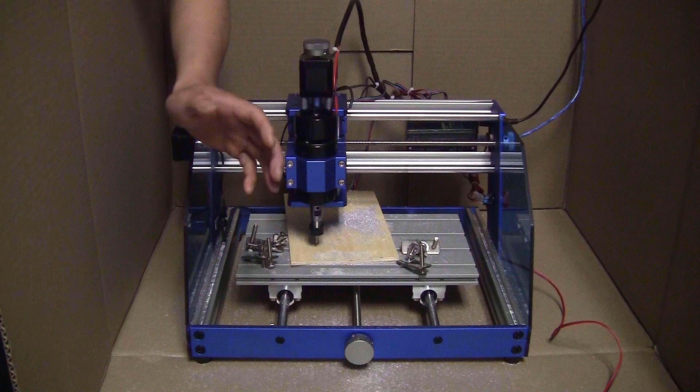Hi guys, as you all know my channel is mainly built on these 3018 CNC machines. I almost cannot get away from them. This type of machine is great for learning, experimenting and prototyping. They are affordable, easy to use with many freeware, but after a while you surely will want to move on to the next level, such as this machine.

I showed you before how I built this CNC machine using a 3018 CNC. This machine surely can be the dream machine for many hobbyists, especially viewers on my channel. I have been using it very intensively to make many things. It is still working perfectly as it should. It is sturdy, precise, fast.

It can cut aluminum very easily without any problem. The only thing still bugging me is that this machine cannot mill steel, mainly because of this high-speed spindle. The maximum speed is 24,000 RPM, which is way too fast for steel. The milling bit will get burnt and ground away. You probably will ask, why don't I just cut at lower speed? The problem with this type of spindle is the torque will reduce with the speed. Lower speed means lower cutting power.

Also, as pointed out by many viewers, this machine design, with a moving gantry, is not the best for metal cutting. Today I decided to build a new CNC machine that will solve both of the problems I mentioned, so I can finally sleep through the night.

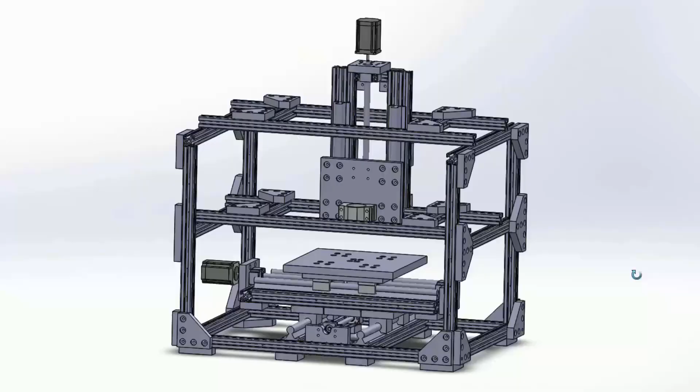The new CNC machine will look pretty much like a box. The frame will be built using 3030 aluminum extrusion bars. Down here are the X and Y axis to move the platform. The Z axis will stay in place, just moving up and down. All the plates and brackets are designed to be milled with the 3018 CNC.

There are 3 plates like this one, and this one might be too big in size for the 3018 CNC to cut the outline, but all the holes and slots will fit inside the 3018 CNC working area. I will show you in detail how to make this biggest plate. The rest of the plates and brackets are really easy, so I won't go into details of the process.

To make the frame more sturdy, I will use 3/4 of an inch thick plywood. The linear rails are SBR 20 or SBR 16. I have SBR 20 for the Y and Z axis. I bought the SBR 16 for the X axis by mistake, but that will be fine. You can replace them with SBR 20 if you like.

All the end bearing mounting plates like this and this are designed to give you plenty of room to use either SBR 20 or SBR 16, and the same flexibility applies to the ball screw. I have the SFU 1204 on the X and Y axis and the SFU 1605 on the Z axis. The reason I have the 1605 on the Z axis is because I already have one in my stock.

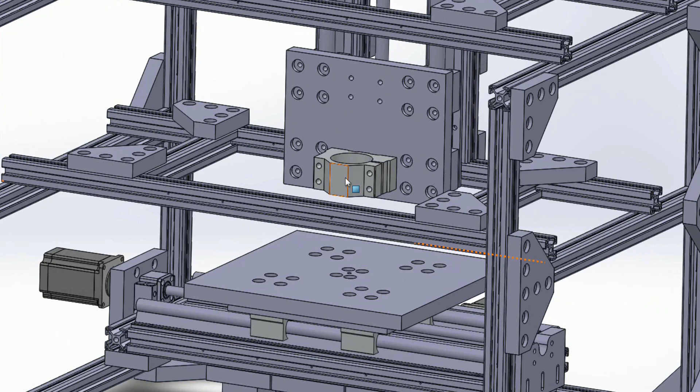For the spindle of this first version, I will use the 52 mm diameter type because I already have one. Hopefully it can still cut aluminum smoothly. Another reason is that I want to keep the cost of this machine low.

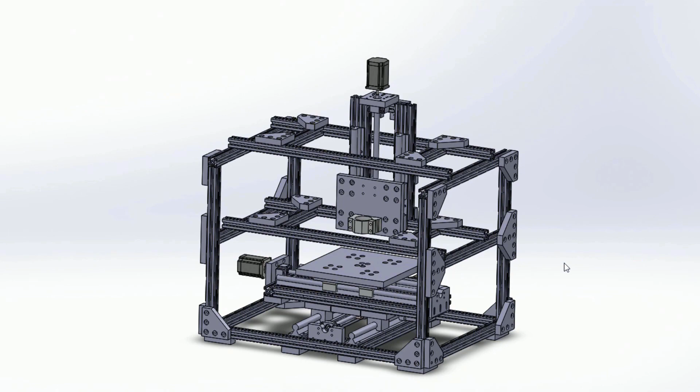Right now I'm still waiting for all the materials to arrive, so I will show you first how I will mill the plywood parts. In Fusion 360, I will go to File, Open from my computer, go to the folder of the machine design, go into Step Files, Platform. I just go directly to Manufacture, create a stock. This time I will choose the reference in the middle of the plate.

And click OK. I will mill all the brackets and plates out of 3/4 of an inch thick plywood. I will go to 3D pocket clearing, select tool.

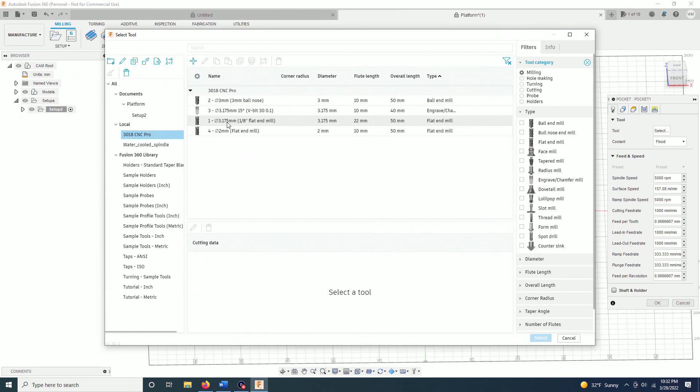I will choose my favorite tool, the 1/8 of an inch flat end mill, 12,000 RPM, cutting feed rate. For pocket clearing, I will leave it at 1000 mm per minute. I just leave all the parameters as I entered before.

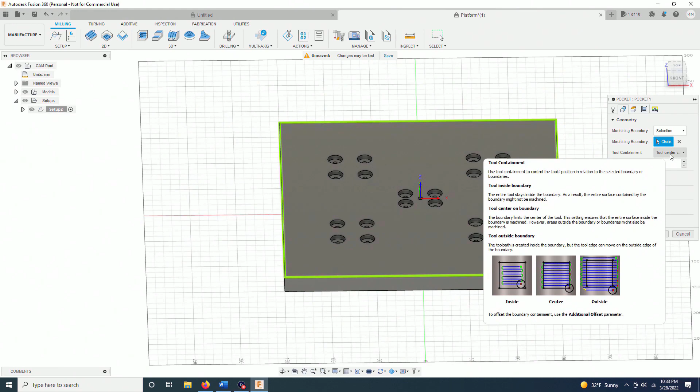Machining boundary selection, this boundary. It will mill all the holes inside the plate. Bottom offset minus 0.7 mm - this is to make sure that the bit will plunge all the way through the plate.

Tolerance, well, I will give it a bit more precise. Maximum roughing step down, I will go with 1.5 mm. Stock to leave, nothing. Full retraction, no. Shortest path.

Okay, this one I will increase it a little bit, 3 degrees. Ramp clearance height, maybe I put 1 mm. Minimum ramp diameter - because those holes are pretty small, so I will make it a lot smaller. I will put 0.5 mm and click OK.

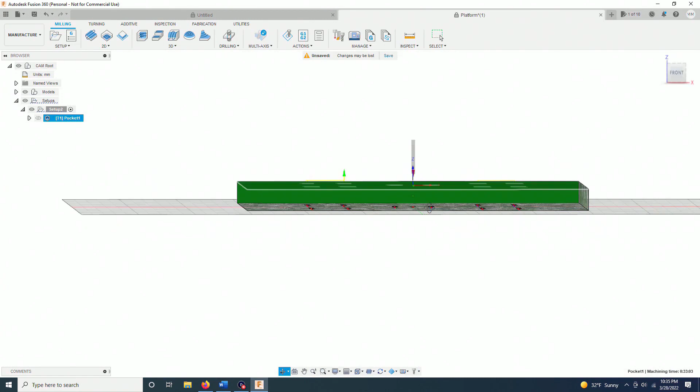As you can see here, all the holes are milled through, so that's what I want. And that's it, I'm done setting up the tool path for this plate. Very easy, so just right click, post process.

New, ultimate CNC machine. Name the file - well, I will create another folder in here first. It will be Platform.

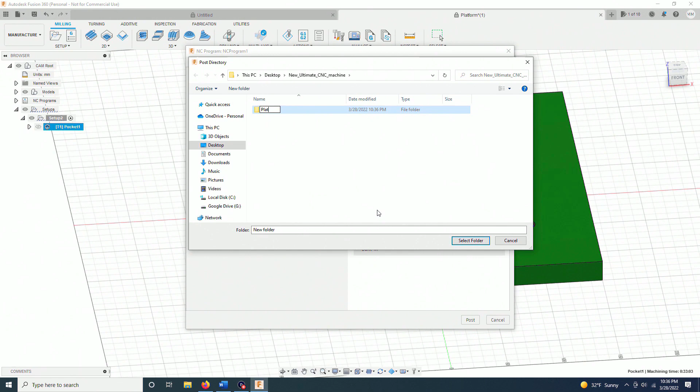Toolpath number 1, 3.175 mm flat end, and post.

And the platform cut to size here, 30 by 30 centimeters. Now I will have to find the center of this plate. It's very easy - I just take a long ruler and draw 2 diagonal lines. And here is the center.

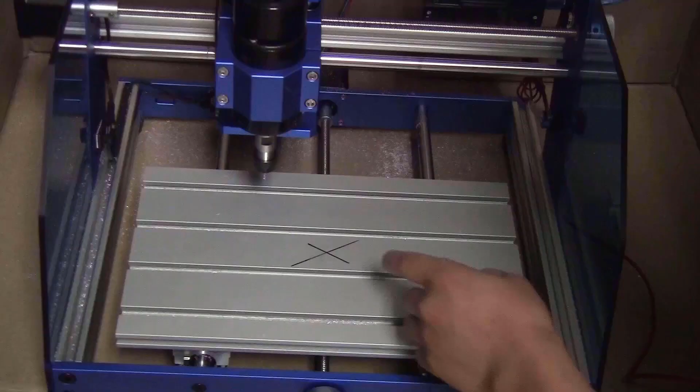I will do the same to find the center of this platform. And this is the center. Next step, I will try to center the bit to this center of the platform and then set X and Y to 0. Just about like this, you don't need to be very precise.

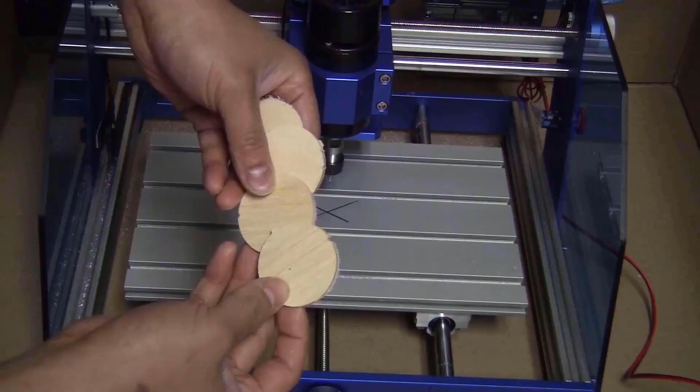I have some pieces of plywood 1/8 of an inch thick. I will use them to space between the stock and the platform so the bit doesn't cut into the platform. At the four corners like this, I will use double side tape to tape them down.

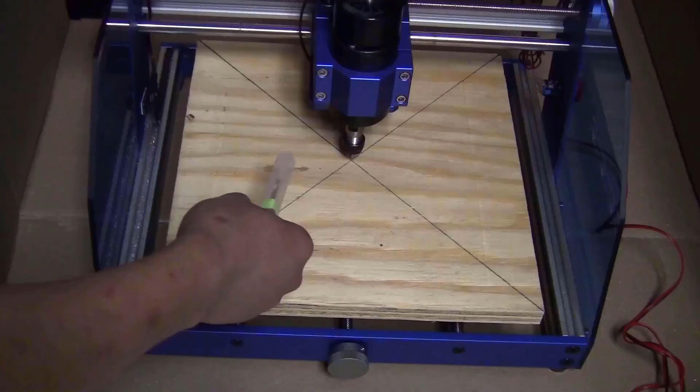Okay, I take the platform like this. One thing I should do first before fixing this stock on the platform is changing the bit. This is a 1/8 of an inch flat end mill bit. The flute length is 25 mm, so it will be more than enough.

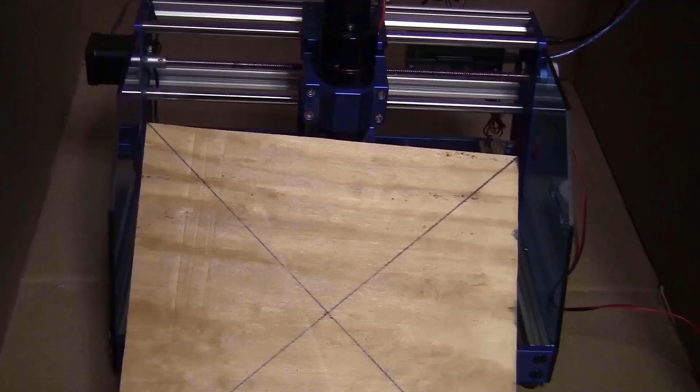Now I will have to find a way to fix this piece on the platform. I will start by putting some double side tape on this wooden piece first. Now I will try to align the center of this piece to the bit. Press the corners down.

It is pretty sturdy, but I don't think that it will be enough, so I will have to find a way to reinforce this. What I was thinking about is to cut some pieces of angle aluminum like this, 90 degree. This side I had to cut a bit shorter, so it can fit on the side like this, and slide inside the platform like this.

I will drill a hole here and thread it with an M6 tap. This one I will drill a hole around here to make sure that when I tighten the bolt it will press right in the middle of this piece of plywood. The hole should be around here, probably 20 mm or 25 mm from this edge.

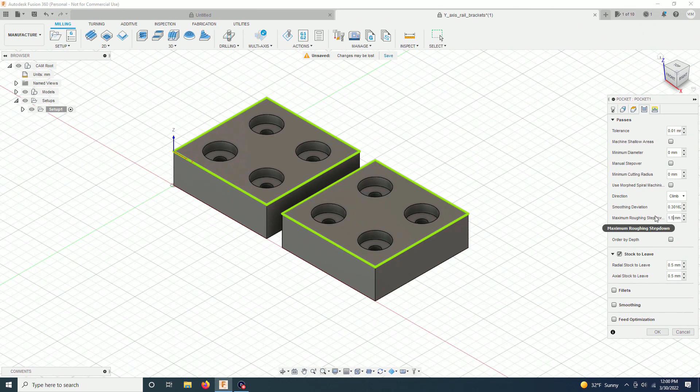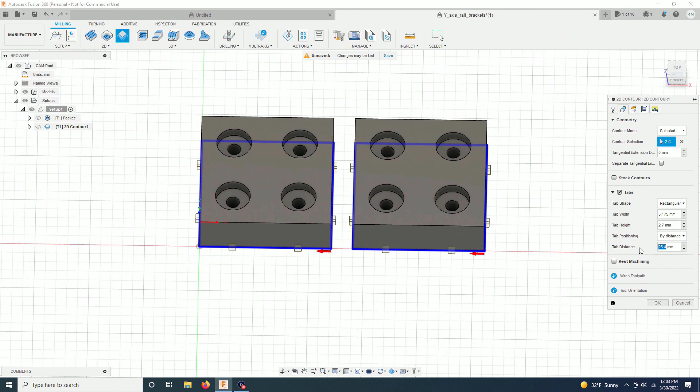For these smaller pieces, the only difference is you can add a 2D contour to cut the pieces out of the stock. That way they look better and more square compared to cutting with the saw. For the 2D contour, it's still the same, but you have to reduce the cutting feed rate. I will go with 300, plunge rate 100. Contour selection: this one and this one. Tab, yes. Tab height, I will increase it a little bit to 2.7 millimeters. Tab distance, I will increase it so I have fewer tabs, like this.

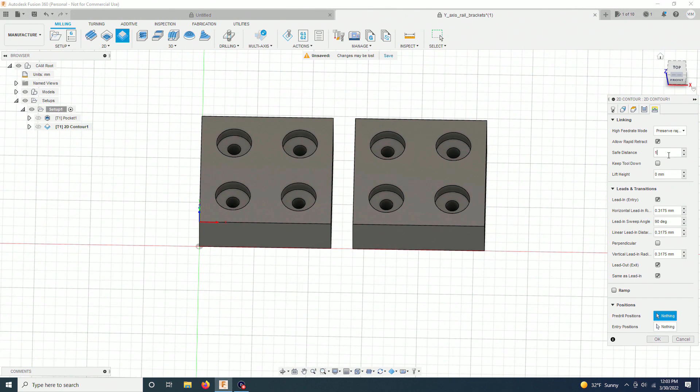Multi-depth, just go very slow, let's say 1.5 millimeters. Yeah, we have to reduce this, and click OK. And that's it, everything looks good. I will use these two paths to cut.

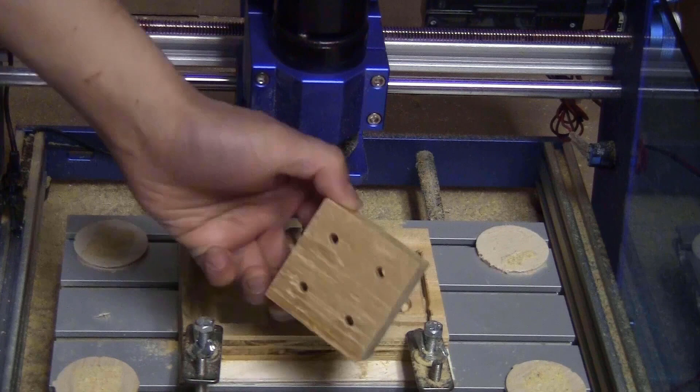Not too bad. I think the top will need to be a bit thicker because the pieces get loose, but it will cut all the way through. The edges are smooth, so I think that's good. I will continue to do this for a few more days.

Here are all the pieces that I need following my design. I hope that I didn't make any mistake because it took me 2 weeks to mill all this, and I am kind of sick of setting up the milling on the 3018 CNC. I really need to take a break from that machine right now, but for now the most tedious step is done. Let's move on to the next one.

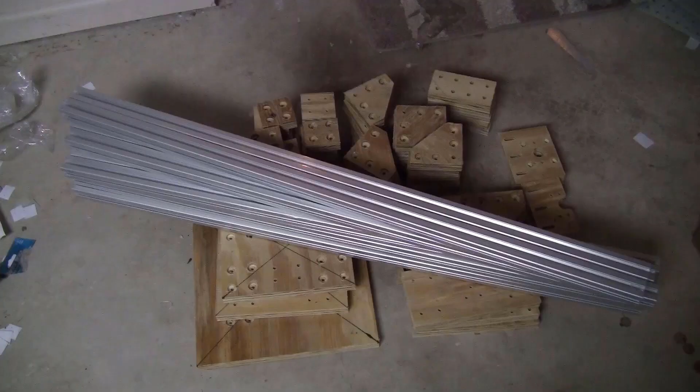From my estimation, I will need about 16 or 17 aluminum extrusion bars like this, 3030 series, 1 meter length. So I bought 20 of them and they cost me $200. Now I will have to trim them to length. I will include the list of lengths that I need and also how many pieces of each. You don't need to trim those bars to the exact length, but try to be as close as possible. The most important thing is that each set of bars should have the same length.

And to trim them to that requirement, I will use the same trick that I show in many videos. I will use an M8 tap to make the thread at the end of all the bars, then use this type of plate to attach them together at both ends so they will be aligned and won't move when I cut. Using this plate I can attach a maximum of 8 bars together, but you don't need to attach all 8 bars, you can attach as many as you want. For example, I will need 6 bars of 750mm length, so I will only use 6 slots.

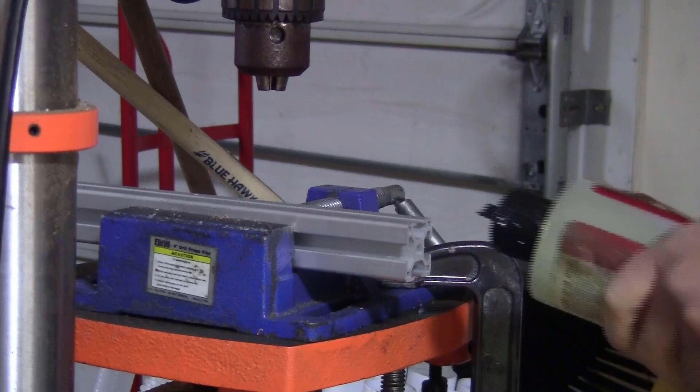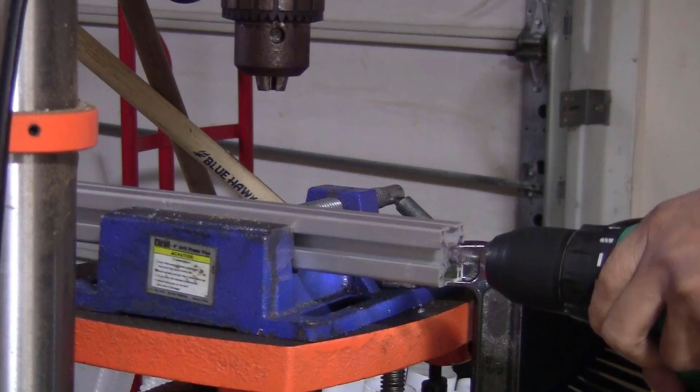To attach the bars to the bracket, I will use an M8 bolt, 30mm length, with a 13mm hex socket.

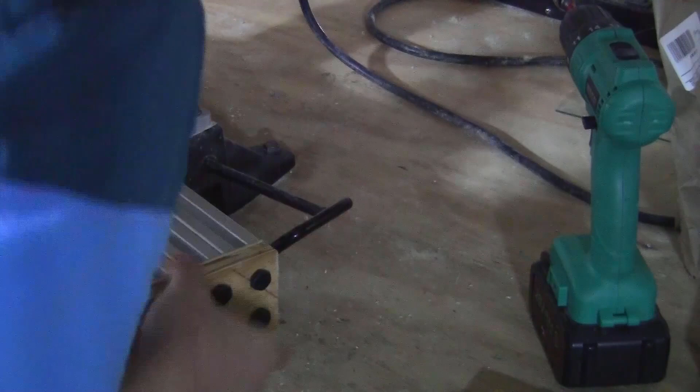Now I have all the bars attached together. I measure and mark the length, adjust the blade, and clamp the bars down. As you can see, cutting all the bars to the same length is really easy. I will make the thread on this end of the bars too, that will make the assembly of the machine a lot easier.

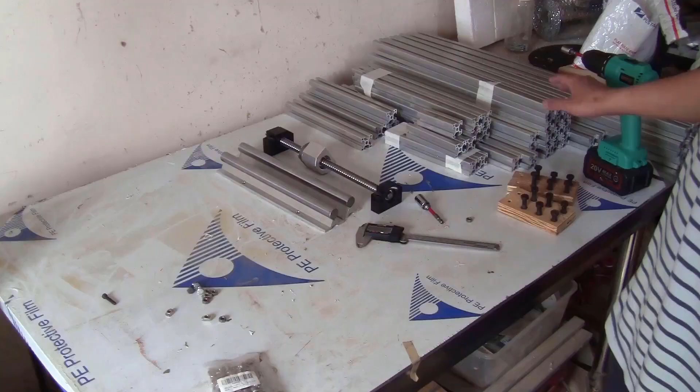I have all the aluminum bars cut here, so I am ready to assemble the machine. There are 2 axis blocks: the X-axis and the Z-axis, which can be assembled without being attached to the frame of the machine. I will start with the Z-axis block. I take the 4 bars of 330mm length and attach the ends together.

I take the 2 linear rails, SBR20, 300mm length, and place them on like this. I will use M6 10mm length to attach the linear rails to the bars, dropping in T-nuts M6. I place the rail on the bars like this, and do the same thing on this one.

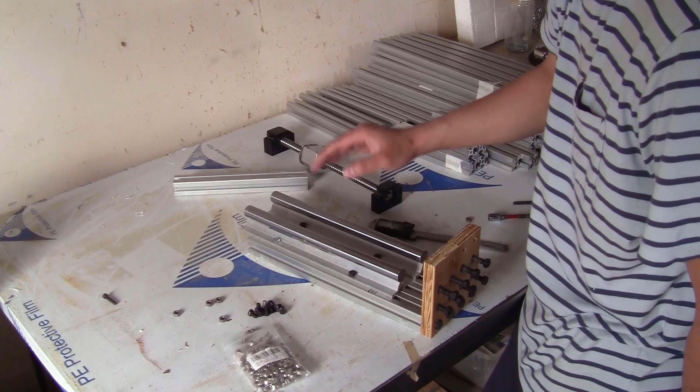The way I wanted to install the rails on the bars is that this rail will stick out about 13mm from this edge of the bars. So I take one of these bars, place it underneath, and push the rail to the edge of this bar. Roughly, you don't need to be precise. Now I can tighten the bolt.

Now I just slide on the linear bearing blocks. Take the Z-axis gantry block; this side is to attach the spindle. It should go this way where the rails stick out. Place this one on like this. I just need to bolt it down, using some M6 20mm length bolts.

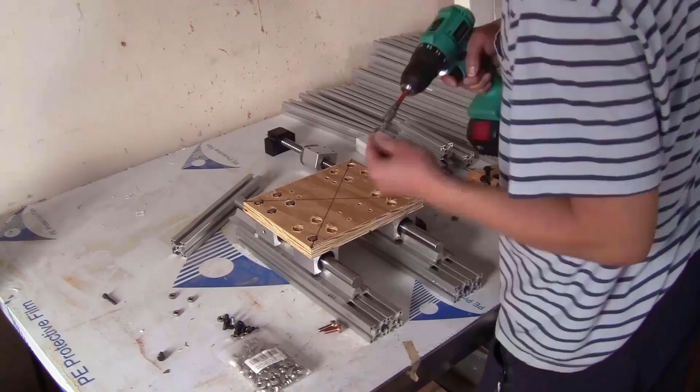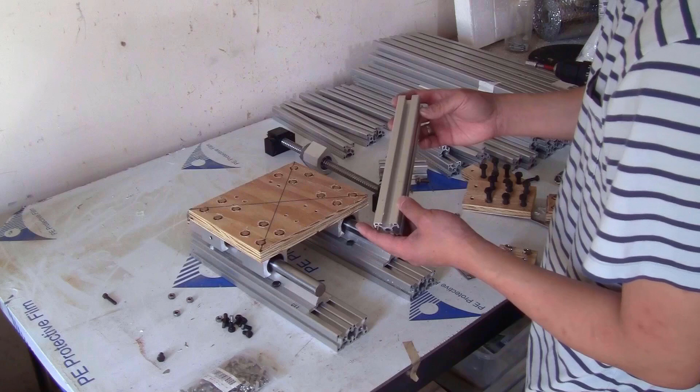Now this plate will be the reference to keep the distance between the two rails. Now I will take one of the 210mm length bars and place it like this. At the end of this bar, I will use some square brackets to attach this bar to those bars.

Next step, I will attach this ball screw set on this plate. I will have to use this piece as a spacer, like this. Place this underneath, and use some M5 bolts, 28mm length, to attach the ball screw to the plate.

Remember that this BK12 block is on this side. Now I will attach this coupler to the ball screw.

Next step, before attaching this block to this plate, I will attach the stepper motor to this plate first. I have 4 of the M5 60mm length.

I will have to attach the motor on like this. I will try it on like this. Slide it in, push it all the way in.

Measure the distance here. Okay, it is about 22mm. Maybe I'll keep it at 23 or 24 to be safe.

I will use a lot of M5 nuts as spacers. I will need about 5 of them on each bolt. I don't think I will need the bolts this long. Put on the nuts.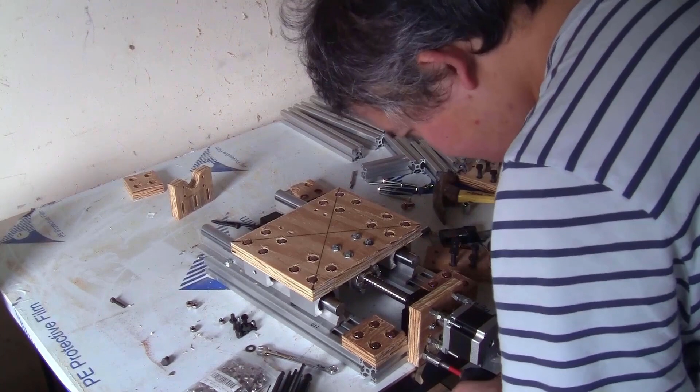Tighten the set screw on the coupler, then turn this around.

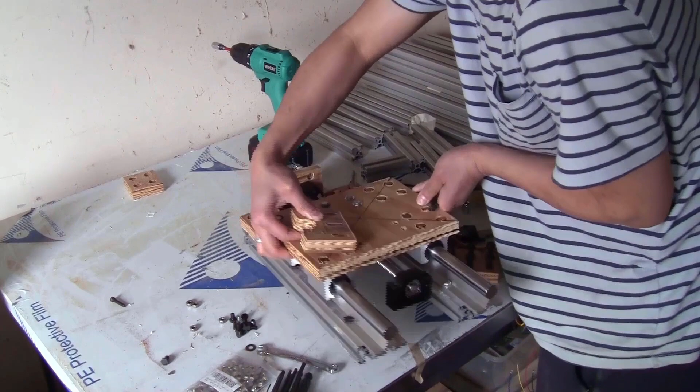Before attaching this piece to this block, I slide some M6 bolts through and put on the drop-in T-nut. Now I can slide this plate on the 4 bolts, and I just need 4 nuts to tighten the bolts.

Now I will flip this block over. Take this ball screw of 90mm and slide it in here.

Okay, press this against this. I will use 2 of the square blocks to fix this bar like this.

And that's it, I'm done with the Z-axis block. It is very sturdy and everything can move very smoothly.

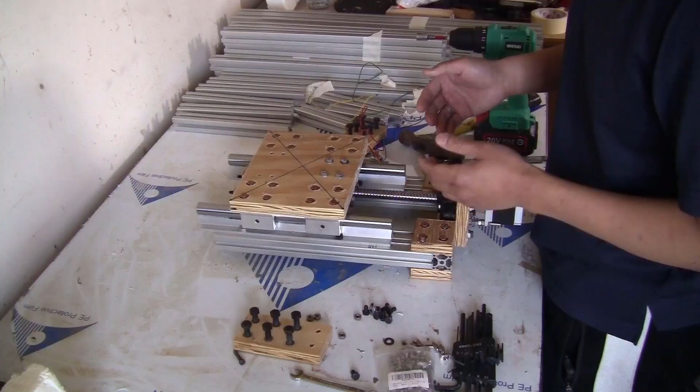I take 4 bars of 500mm length. As I said before, for the X-axis I will use SBR 16, 500mm length. But to make it less confusing in the design that I share, I will only use SBR 20.

Actually, before installing this rail on those bars, I think it's better to use some square blocks to attach the bars together first.

Now you can fix the rails on the bars.

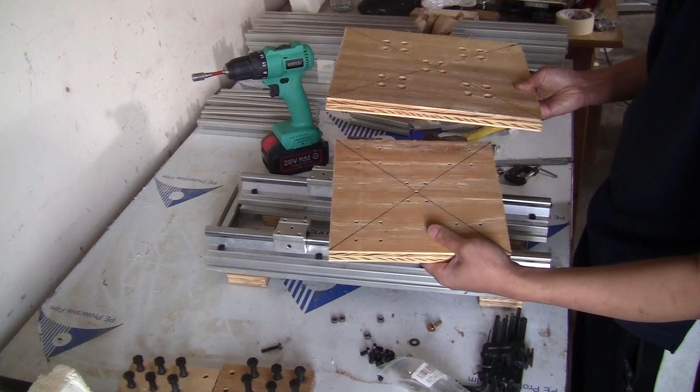I will do the same thing for this side. I just slide on the linear bearing blocks. I will have to attach these two plates on those blocks, using 16 of those M5 40mm length.

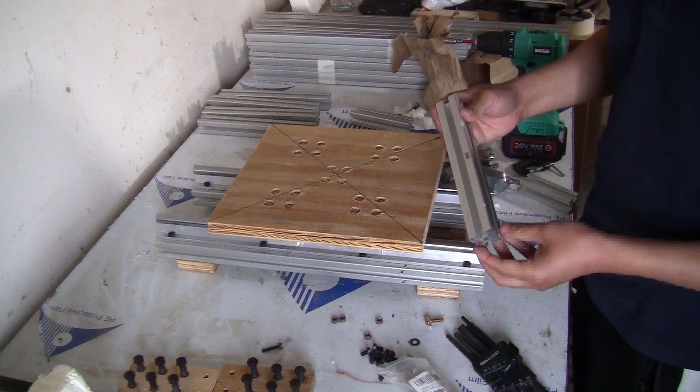It slides really smoothly, a little bit different from the Z-axis. To fix this 210mm bar at this end, I will use this type of corner bracket that I bought on Amazon, like this. The reason is that I don't have any space up here to use the square bracket.

And now I flip it over. Now I can reinforce these corners with the square brackets.

All the next steps are very similar to the Z-axis block, so I'll just skip through them very quickly.

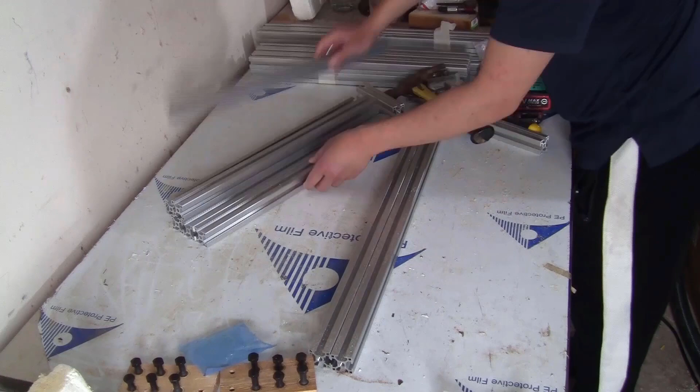For the base of the frame, you will need 2 of these long bars, 750mm length, and 6 bars of the same length, 500mm.

The base of the frame will look like this. These bars here will be used to install the linear rails, and this to fix the side of the frame. So let's just put everything together. I will start by installing the linear rails on the bars first.

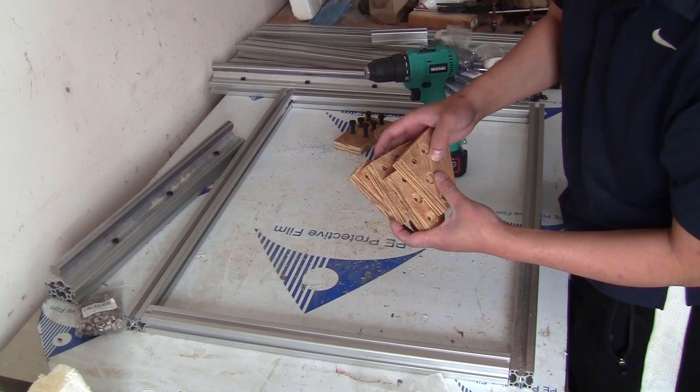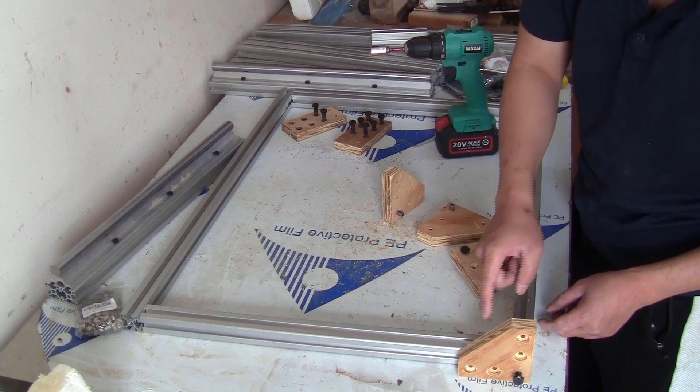Now I take these 4 of the 90-degree corner brackets. The 4 brackets have a big hole in the corner here to slide the M8 bolts through. These 4 corner brackets will be attached at the corner like this. The M8 bolt here is to attach to the end of this bar.

Now I have this rectangle base attached together. Just put the rails in here.

From my design on the computer, I measured the distance from this edge to this edge as 219 millimeters. I take this ruler, put 219 millimeters, and again I'm going to use some of this corner bracket to fix this bar together first.

I can take the bracket off later, but for now I just want to make sure that the bars won't move. And I will leave this side loose for now so it can move around.

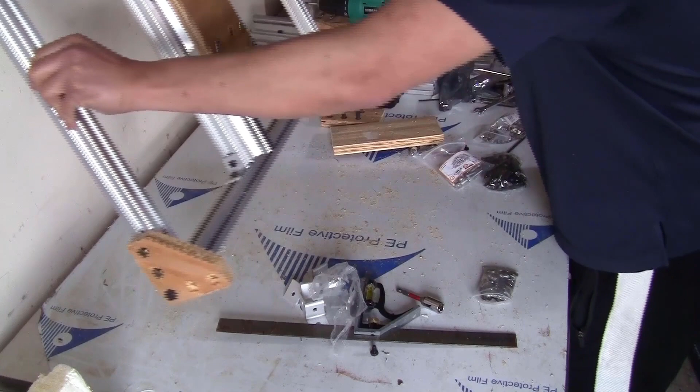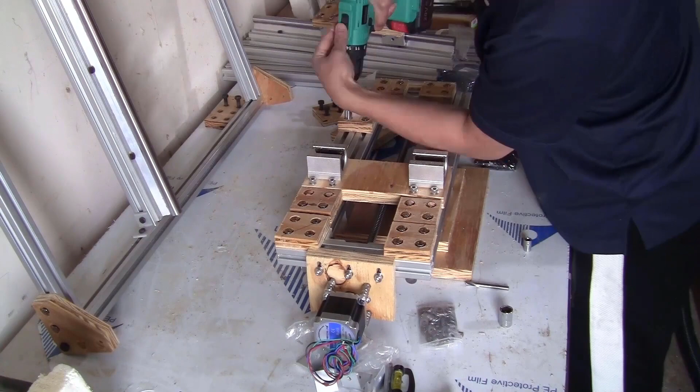I take the x-axis, put it on the table like this. This plate is supposed to be installed like this. I will move the bracket closer to the edge here. Again, from my design, I measure the distance from this edge of the bracket to the inner edge of the aluminum extrusion bar is 110 millimeter.

I actually will have to uninstall the brackets. After measuring, I will fix this bracket down. Now I will use this square bracket to fix this bar to the frame. Make sure that the y-axis moves smoothly and fix also this side. Now you have those square brackets on, you can take off those side brackets.

Next step, I take this corner bracket to reinforce the corner of the frame. I will also reinforce the bar with 2 square brackets. Next step is to install this ball screw on the y-axis, but before doing that, I will attach this 130mm length bar. I will use 2 of the square brackets to do that.

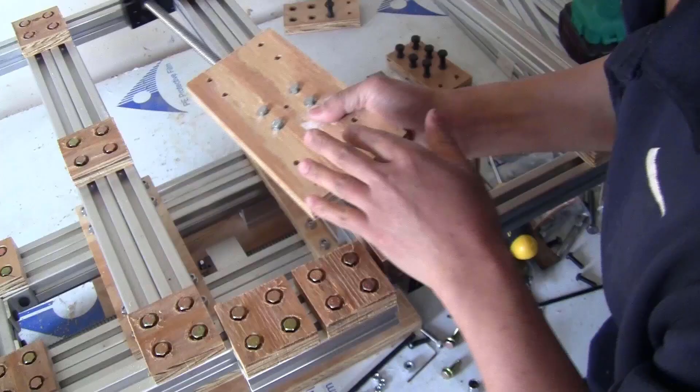Now I take this plate and the spacer, attach this plate on like this. I will use 4 of the M5 28mm length. This plate here will be fixed right here, so I will slide some of the M6 bolts through with the drop-in T-nut. Roughly adjust this to the middle here of the 2 brackets and tighten the bolt.

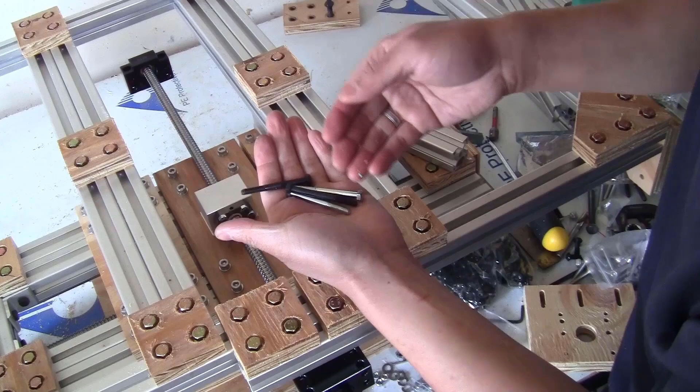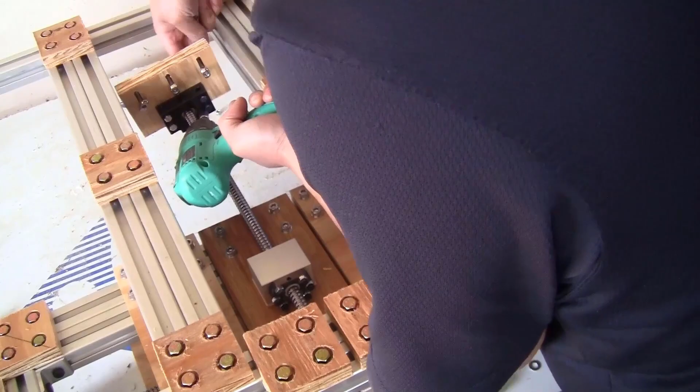I will take 4 of the M5 bolts, 40 or 45mm length, slide through here. Now I take this plate, slide through some of the M6 bolts. I just slide this plate on here and tighten with the nut. Actually, I should turn this block around and slide this plate on this way. I will leave this side like this for now. From here, things get pretty similar to the X and Z axis.

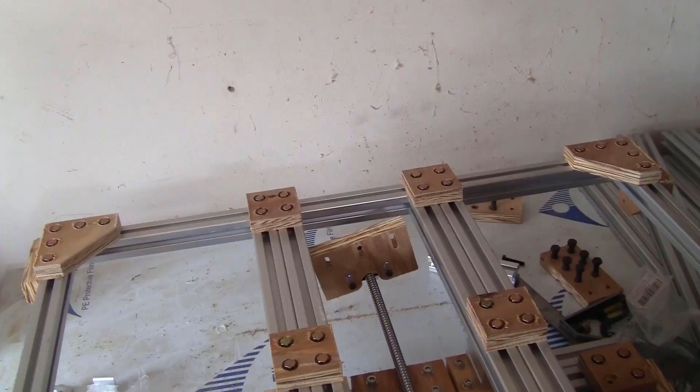Now this end is fixed, I can fix the other end. This is not easy, so I think that I can think of another way to fix this. Okay, what I will do is that I will slide the bolt on this plate first and attach it on the block from this side. So that way I will have more space back here. Now I can use the bolt again. Slide this bar on.

I just realized why I made the design like that before. Because if I do it this way, I cannot really attach this bar to those bars using the square bracket. It gets blocked by this bracket. So I have to think of a way to shift the bracket a bit to the side. I think that I will use the bracket to fix the inner corner here.

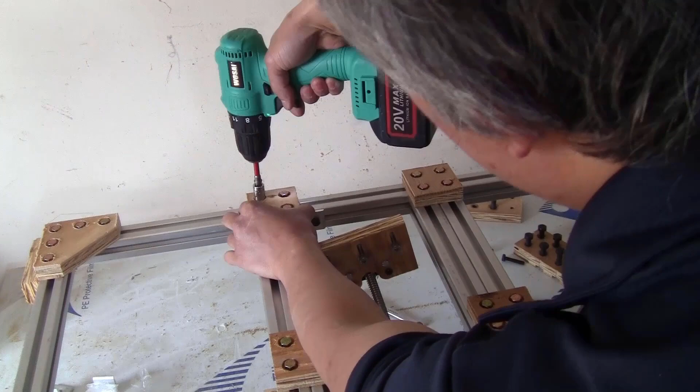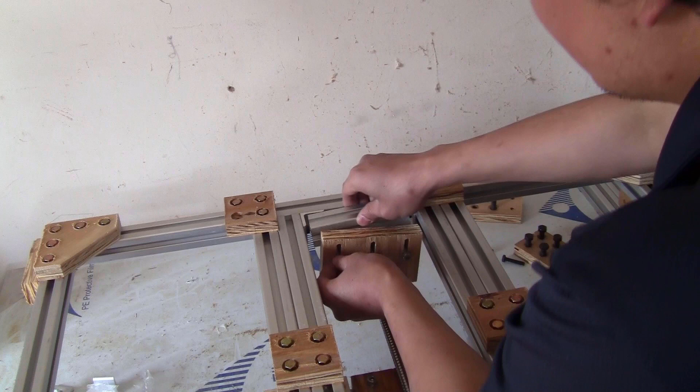I'm almost there, but this bar is a bit too long. It gets blocked by the bolt, so I will have to trim it. So this bar now is about 118mm length. And you can slide it in here. So I'm just going to fix it on like this.

And that's it, I'm done with the base of the frame and the X and Y axis. Now I will flip this over. It is heavy, so make sure that you have everything cleared out before you flip it. Wow, like this, it's not bad at all. It's very sturdy. Next step, I just build up the frame to attach the Z-axis to it. I will need another 4 bars of 500mm length.

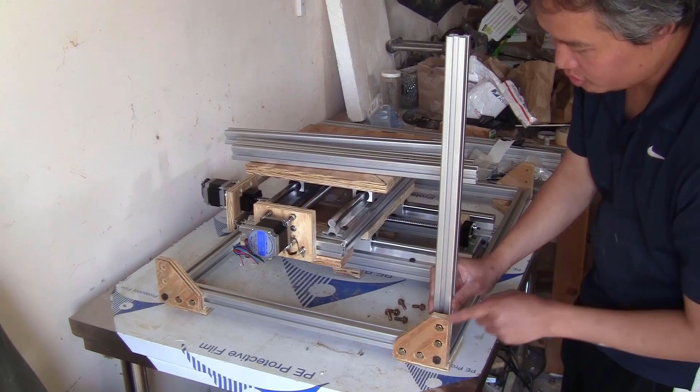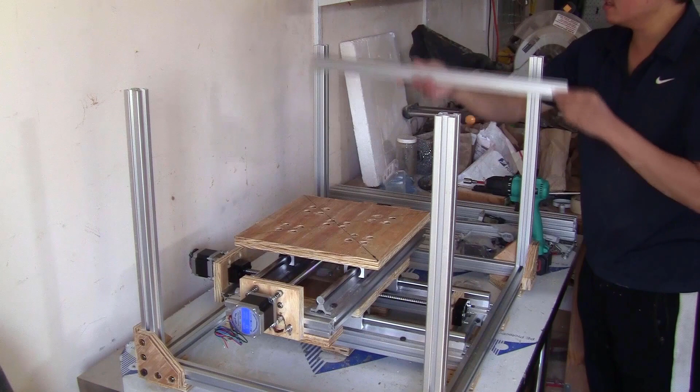Attach this bar vertically to the corner bracket. I will take 4 more of the corner brackets to reinforce the bar like this. I take 2 bars of 560mm, place them on top like this, and fix the bars together using some of the corner brackets.

Next step, I will use the T bracket to install the bar on like this. From my design on the computer, the distance from this edge to this edge is about 280mm. So I set the distance and measure and tap it down. It is very sturdy, but I wanted to make sure that it wouldn't move, so I will use some of the corner brackets to support the inside of the corner here.

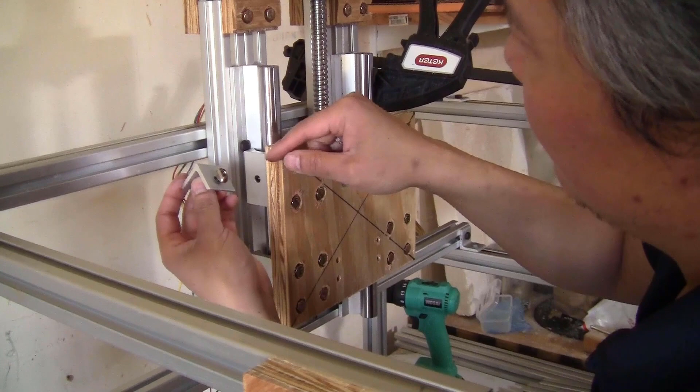At first I was thinking to use the bracket to attach this bar to this bar like this, but the distance from this hole to this edge is not exactly 15mm as I expected, so I couldn't do that. So I had to figure out another way to fix this bar to this bar. I have this extra piece of aluminum extrusion bar. I will install them on like this and install the bracket like this. That way this side of the Z-axis block will be supported by the frame.

I intend to install more of the bracket here and here, also inside here, to increase the support, but I ran out of drop-in T-nuts, so I'm buying some more, and also I don't have enough of the drop-in T-nuts to install the bar here and cross here to increase the sturdiness of the frame. But for the first version to mill aluminum, I think this could be more than enough. So the next step is to install the spindle, connect all the wire to the controller board, and try to test milling some aluminum.

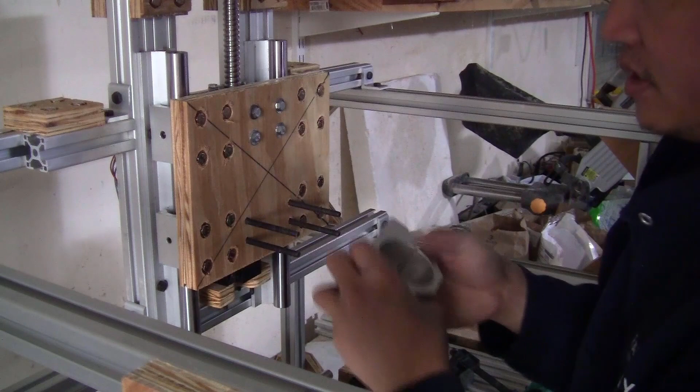To install the spindle, I use 4 of the M6 bolts, 80mm length. Put on some washer and slide them from the back to the front. Slide on the spindle clamp. Put on the washer and put on the nut. You can tighten this side first. Slide the spindle in.

For the control unit, I go very simple. I have here 36-volt power supply to power the stepper motor drivers. I have 48-volt to power the spindle that I will turn on and off through this relay. And the control signal will go from the output number 1 from the controller board. This is the stepper motor driver for the Z-axis, X-axis, Y-axis. This is the DC step down that I step down from 36-volt to 12-volt to power up this controller board.

I use this board because it's really cheap and it's compatible with Mach 3. You can use any controller you like, Grbl, another Mach 3, Mach 4, it doesn't really matter. But for me, this is really cost effective, and also I already paid for Mach 3, so I'm just going to use it. Now I will connect all the components to this board, stepper motors, spindle, and that's it. The machine should be ready to go.

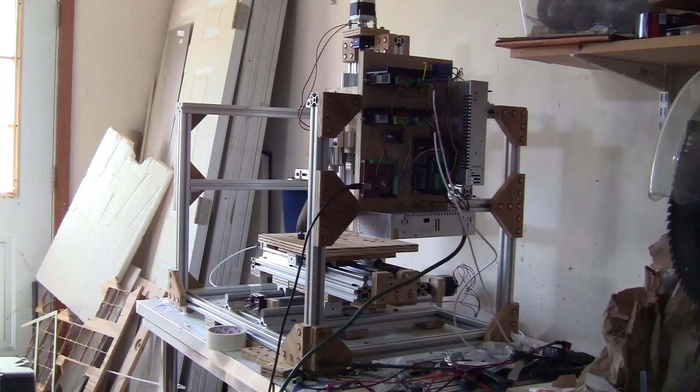I decided to hang the control unit on the side of the machine so it is more neat and tidy. You don't really need too much cable management. There are very few cables that are actually moving, like this wire here for the spindle, and also this cable for the stepper motor on the X-axis. All the other wires will stay in place.

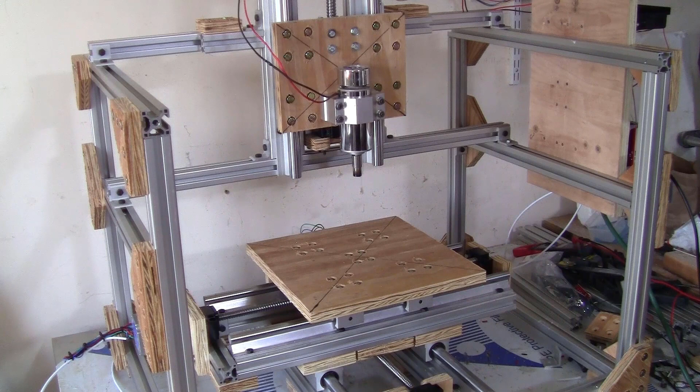Now I will connect the machine to the computer and test moving all the axes. Let's start with the Z-axis. Up, down, now to the X-axis. Move to the left, move to the right, okay. Y-axis, move to the back, move to the front, back to the center.

The direction of the X and Y axis might be confusing on this machine. On the X axis, when I said moving to the left, but the platform moved to the right, it actually was the right direction, because what you are supposed to look at is the direction of the movement of the spindle compared to the platform. So when the platform is moving to the right, the spindle is actually moving to the left in reference to the bed, and the same thing with the Y axis.

Now I will try to turn on the spindle with the relay. It worked, as you can see, so the machine is ready for milling. One thing I just realized is that I forgot to install the stopper for all the axes. So right now, with the length of the ball screw, the bearing blocks might run over the edge of the linear rails. To stop that from happening, I will have to install some stoppers.

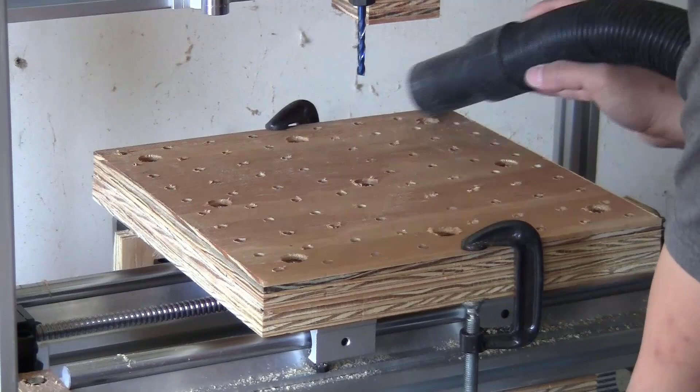That's all a bit rough. I think I pushed too hard on this long bit.

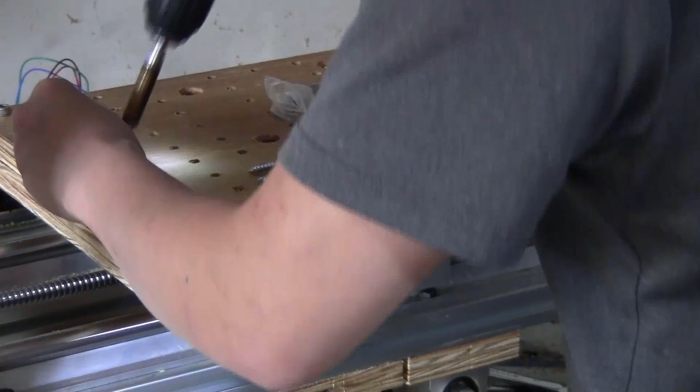Now I have the wasteboard installed. I can lower these two bars, so lower the Z-axis to use the shorter bit. Then I will do some calibration. I'm not going to show how I do it. If you want to know, you can look at my other videos. And then I will be ready to mill some aluminum.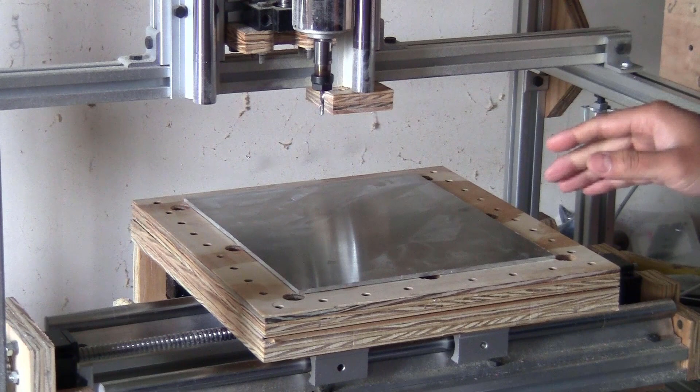I just did the calibration very quickly on this machine, and this was really easy. I probably will show you all the tricks in the next video. For now, I just wanted to test milling some aluminum on this machine just to see how it works. I'm pretty sure that this machine can do it because I used a 200 watt spindle on the 3018 CNC, and I was able to do it roughly.

On this machine I have a 400 watt spindle, better frame, a lot more sturdy, so it should cut a lot more smoothly. I will try to make some square brackets out of this piece of aluminum sheet, 1/8 of an inch thick. I will use a 4mm flat end mill single flute. I will cut a lot faster compared to the 3018 CNC.

1.5mm step down and 750mm per minute feed rate for pocket clearing. 0.8mm step down, 215mm feed rate for 2D contour to cut the pieces out. The 2D contour, I couldn't do it directly on the 3018 CNC, but with this machine I think it will be able to handle it, so let's see how it goes.

From my experience with milling aluminum sheet, it is good to clamp the stock down, but it is also very important to clamp all the sides to make sure that it doesn't rotate or slide when you cut the 2D contour, because the loading on the 2D contour is very strong. It might push the piece out of place, so make sure that you have a good clamp or vise system to push the piece from the side.

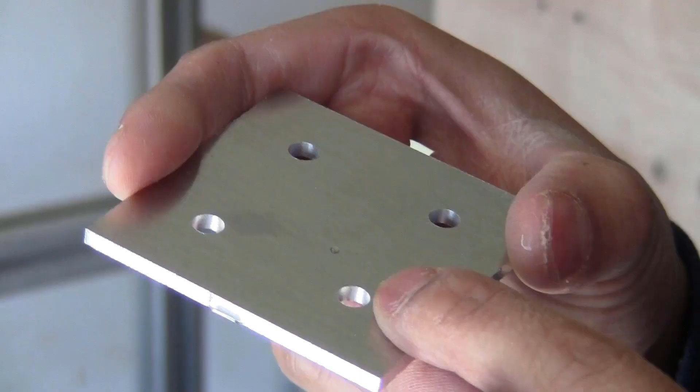The outline edges are not as smooth as I have on the 2.2 kilowatt spindle. I think that 0.8mm step down for the 2D contour is a bit too much. Maybe I will reduce it to 0.5mm. It will cut a lot smoother. The inner edges of the holes here are really smooth because I did a finishing pass for each hole. So it is really smooth and shiny inside.

Overall, I think the cut was quite smooth. It is the best cut that I have on the 400 watt spindle. And to make 9 brackets like this out of aluminum is a lot faster compared to making them out of plywood on the 3018 CNC. So I think that upgrading this machine to all aluminum brackets would be a lot faster compared to the first step building this machine out of plywood, and the machine would be a lot more sturdy.

At the beginning I thought that I would show you how I will replace all the brackets with aluminum pieces, but the video is taking a lot longer than I thought. So I think that right now is going to be enough for this video. I will show you the next step to upgrade this machine to all metal brackets in the next video. If that doesn't take too long, I will also show you how I'm going to upgrade the spindle to mill steel. I hope that you also like this design.

You can build this machine just using your 3018 CNC, and the biggest power tool you will need is the miter saw. So it really doesn't require too many tools and equipment to build this machine. You can cut aluminum pretty smoothly with this 400 watt spindle. Imagine if you have a bigger spindle like 1.5 kilowatt or 2.2 kilowatt like I have on the other machine, it will cut so much smoother. And also I'm sure that after the next step, when all the brackets and plates will be made out of aluminum, it will cut so much more precisely.